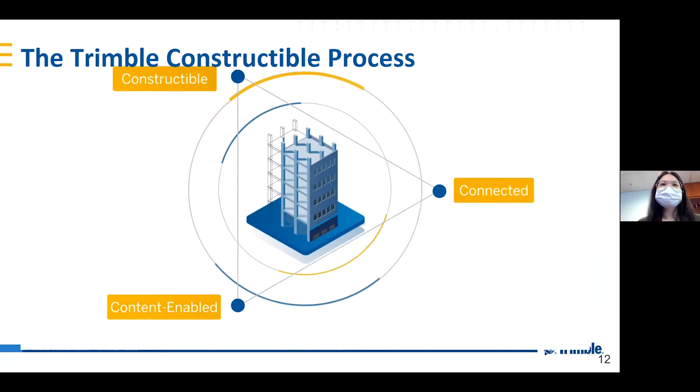There's a digital transformation underway, and the new way to work is leading it. It's called the Constructible process, and it's optimizing the entire design, build, and operate lifecycle. Here's how: Trimble's Constructible process focuses on three key areas - all phases and trades are connected, models and workflows are content enabled, and constructible models drive smart workflows. The first C, connected, is collaboration at its core. It allows information to flow back and forth freely for successful on-time project completion. Cutting-edge technology enables connectivity across...

I think you're having issues hearing the video, Pei-Ling. Oh, you can't hear it? Yeah, I think let's move on. Yeah, running a bit late, so let's move on.

What we're trying to say here is we have the right content, which is digitalized and on cloud that everybody can use and share at the right time with the right information to the right people. This helps us to plan and be connected in whatever we do, whether we're using the data for day-to-day or to extract precious planning information or to allocate resources.

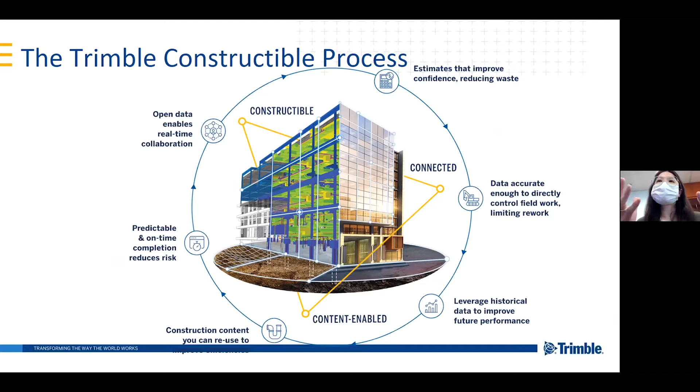The constructible process is not new. It's already been implemented successfully in many companies. Now, we have been building all these models, right?

Everybody must have learned how to build a simple 3D data. And this data, how can we communicate? Because the architect might be using another technology, another software, and your contractor may be using something completely different. So how can we communicate? We need another tool which can help us gel everything together and collaborate effectively.

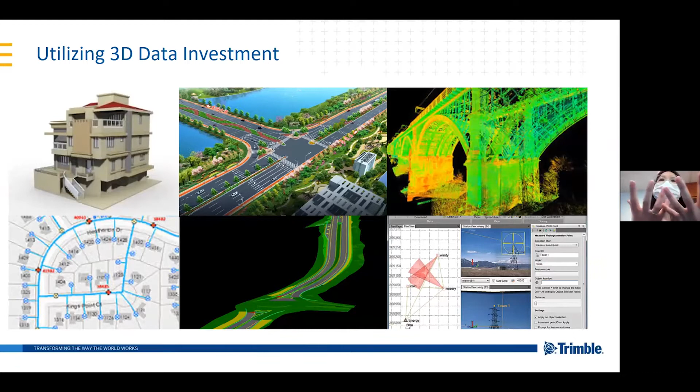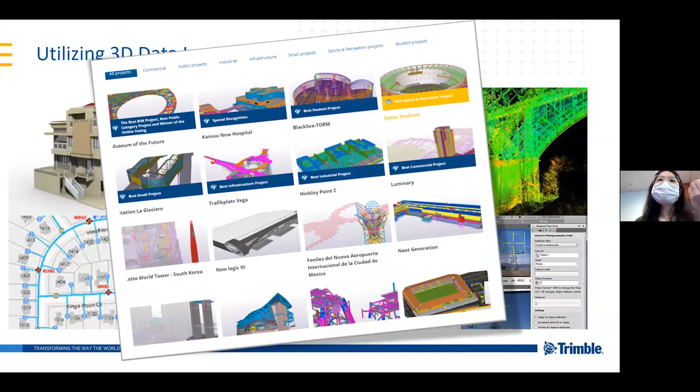So these are some of the models that our users create, and these are very detailed, very accurate models. It's so detailed that we can, in fact, build what we model and build what you see. So there's no discrepancy there. That's very important. The content has to be there.

And so with the right content, we can do a data-driven collaboration. And when I talk about data-driven collaboration, I'm referring to our Trimble Connect solution, which is actually installed on our XR10, which you will see later on.

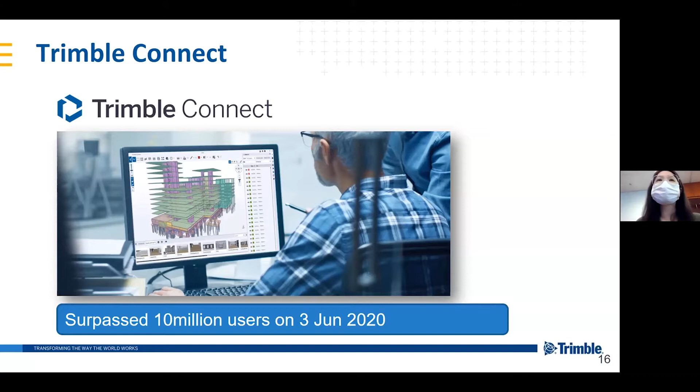Now, during the COVID-19 pandemic, we actually surpassed 10 million users on 3rd June 2020, and everybody is trying to collaborate on cloud. This is the most efficient and, in fact, the cheapest way to do it. And it's very effective. So this is just a snapshot of what Trimble Connect does.

You can use it on your desktop, on your tablet, on your phone. So if anyone has a phone right now, you can download a Trimble Connect app. You can load any information, whether it's a 2D file or a 3D model, and you can view them and communicate it straight away to the entire team. That's how effective it is.

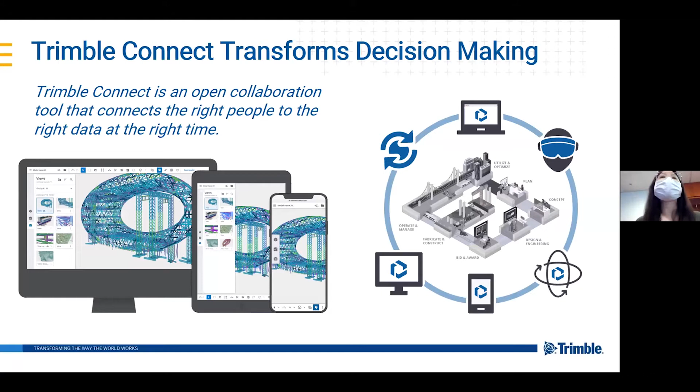And we have real life projects that's already been used. Like I said, we have 10 million users that surpassed already. And these are actual industrial users. So we have a lot of case studies that's online. If you need more information, let me know. We can send it out to you.

Now this brings me to the real topic of the day, which is digitalize, how we can do remote real-time collaboration with the content and the collaboration tool that is already available to us.

So when I talk about XR, it means extended reality. It could be in the form of VR, AR, or MR. And in this episode, we are talking about MR, because we actually are able to merge the virtual and digital world with the physical environment where we are at.

Without much ado, I'm not going to talk too much about our products, but what is worthwhile talking about is this mixed reality can be used by the architects, by the general contractors, by the prefabricators, subcontractors, and all the way to facility management.

So what I want to do right now is to introduce some case studies, and then I'm going to move on to let Leonard show you what he's learned the past few days and what he can use the XR10 on.

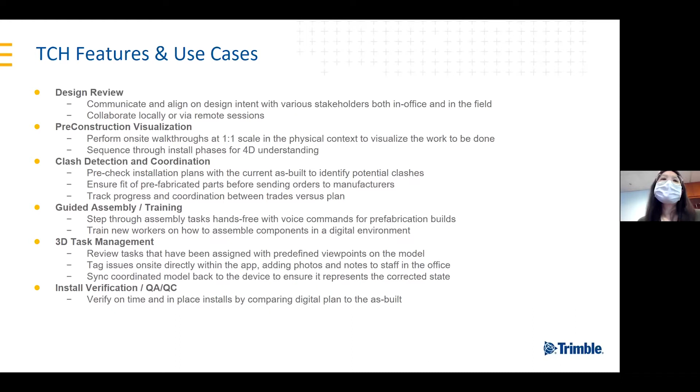So these are some of the use cases: design review, pre-construction visualization, clash detection, and coordination before it goes out to site, and also on-site training, 3D management on-site of how you want to delegate the task and who sees what, and how do you want to create to-do lists and RFIs just via the collaboration tool and the XR10, and also for verification, QA and QC. All these can be done using our mixed reality hardware software.

So there's a video, but I do not want to play it because it seems that you can't hear it anyway. But feel free to let me know.

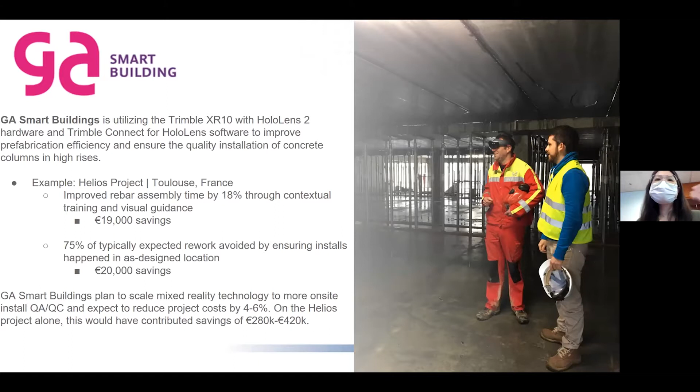This is one of our first GA Smart buildings users. They are situated in France, Toulouse, and they've used this XR technology for a long time on various projects, from start to finish. These are some statistics, and beyond the savings in dollars and cents, there's the satisfaction that this technology actually works. This is a sharing from Remy Vizier, who's leading the team into this new technology.

This is another video, another case study by John Manfield. What happens is they are able to incorporate even beyond what we are offering by adding Dynamics 365, which is Microsoft, so they can do remote assistance. That means whether you're on site or communicating to someone back in the office, both of you can actually annotate on the same model and create an interactive session between each other. We will share this video if we can with the help of the BeyondX team.

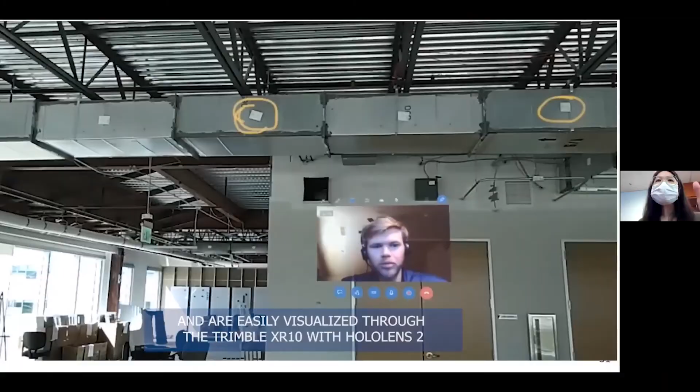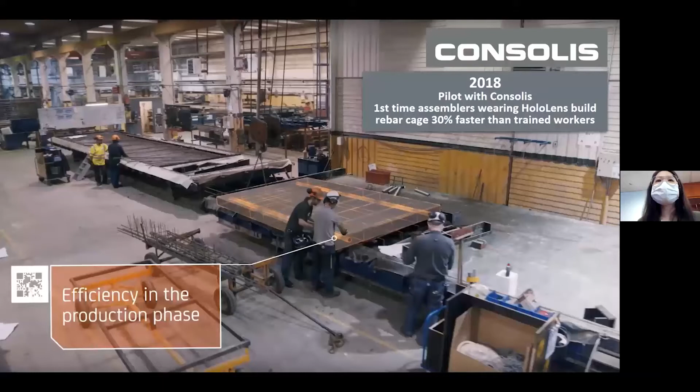In 2018, before the release, this is the pilot project. We used the XR to do a walkthrough on the first run, and the savings are there because we detected clashes just through the first walkthrough. These are things already happening with the technology, taken advantage of since 2018, before the actual official release of the HoloLens.

Our customer also used it on their production floor as training to train new recruits. This is a very interesting video, and there's actually a competition. We're teaching the new recruits how to put all the rebars together, while the experts, the rebar installers, are also putting it together at the same time. Guess who won? The new recruits who have no clue what they're doing. They just followed the steps and were able to get the job done faster than the experts. It meant a lot, and they've actually proceeded to continue with this kind of training.

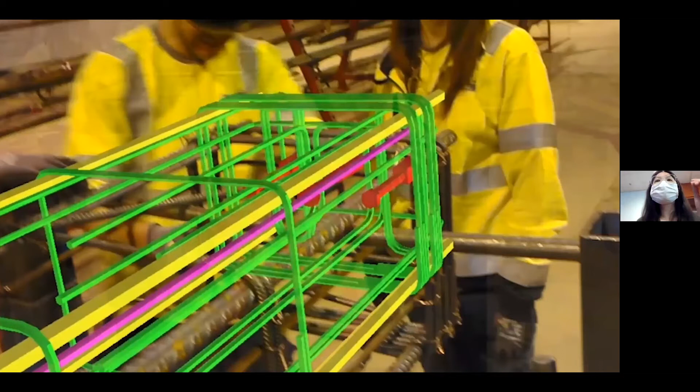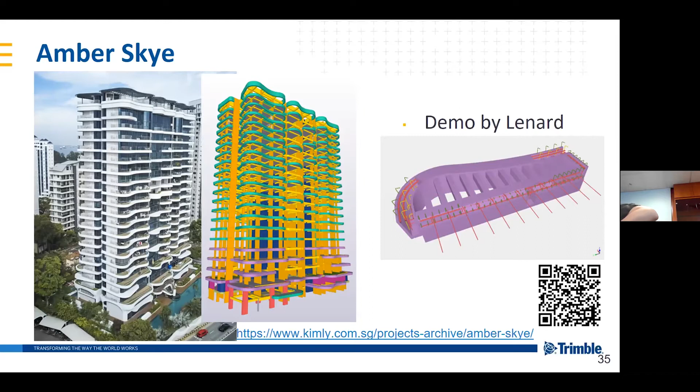Right now I'm going to hand over to Lenard. Okay, can you share your screen, so that everyone can see what he actually sees inside the XR10? Yeah, you can see it now. We can see what you're seeing right now.

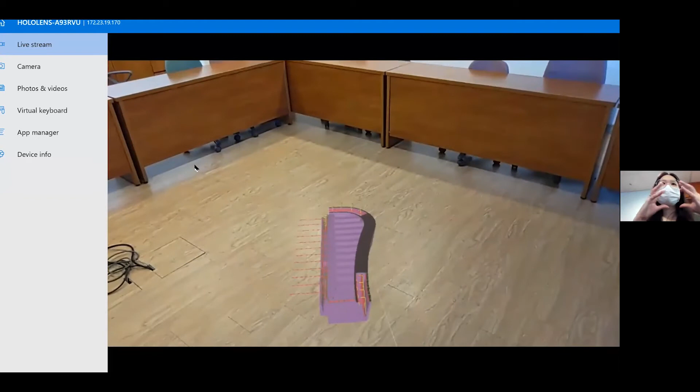What we're going to do first is show you that a big project, when it breaks down to a precast module, we have the information, and we can actually view it using the XR10 on site or at the fabrication floor. This is a very simple model - you want to open up the model of just part of the trellis, the balcony, which is a precast component fabricated offsite. Every bit and every piece was actually transported on site for assembly. This whole thing with the rebar and the concrete elements, these precast elements, is all done at the factory floor, then shipped from Malaysia, JB, all the way to Singapore for installation.

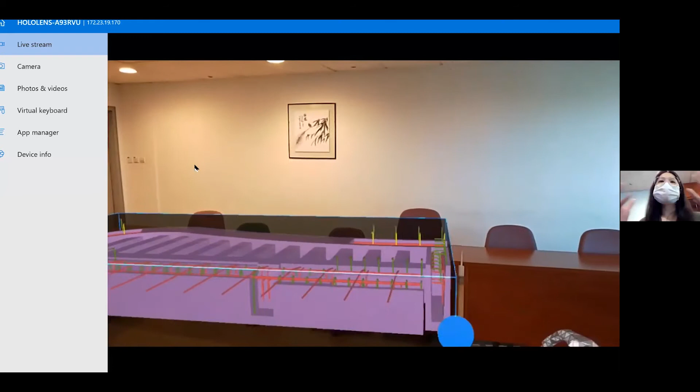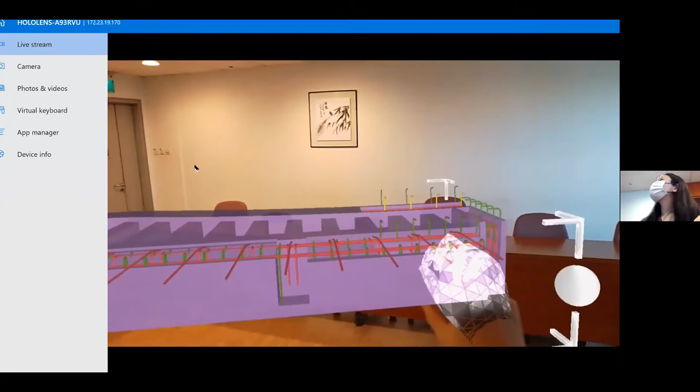So how this was made off the factory floor - unfortunately we don't have a video of that, but this is to show you that if you have the right information, all this can be extracted on site for prefabrication as well as for installation. Let's move on to the other model. Just to give you an idea what Leonard is able to do, to see - he can stretch, he can view, he can look at the information in 3D.

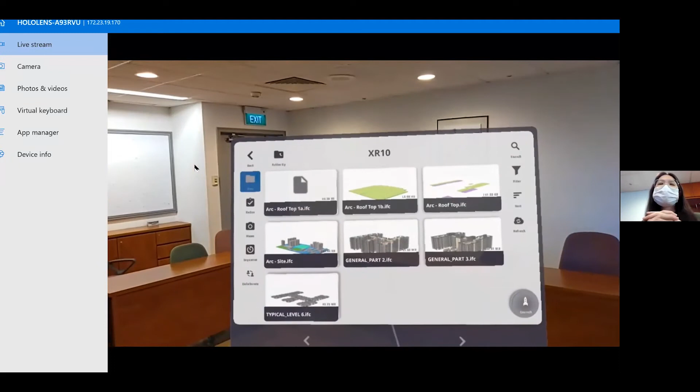Next we want to show you a huge model - this is the Golden Village development in Vietnam. The detail model was developed for 3 or 4 towers, and this is a huge model. We want to show you that you can actually incorporate the architectural as well as structural elements in different layers, and you can view or switch off any layers that you do not want to see at that point in time, or extract information that's relevant only to you.

It's loading—it's a huge structure, so I'll give it some time. I know I'm running out of time, so I'm wrapping up soon, Sunita. This is the last thing that we're going to show you.

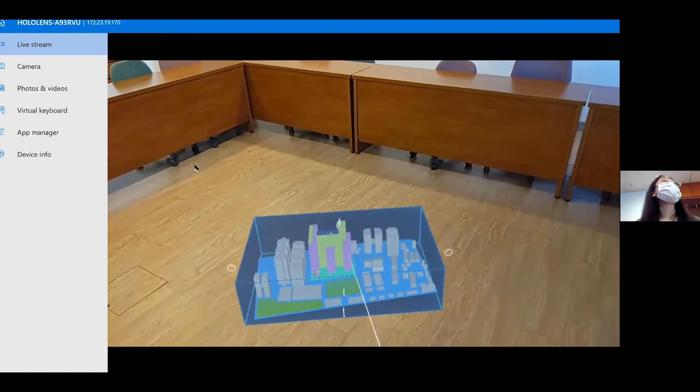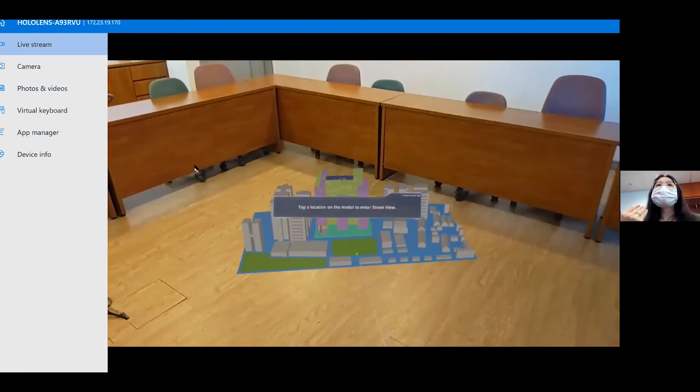What really spells out this extended mixed reality is that you're not just seeing the virtual world. As you can see, I'm in one of the NUS computer rooms. You can imagine if you're on site doing a walkabout, you can actually do a street view, so now we're going to navigate to a street view.

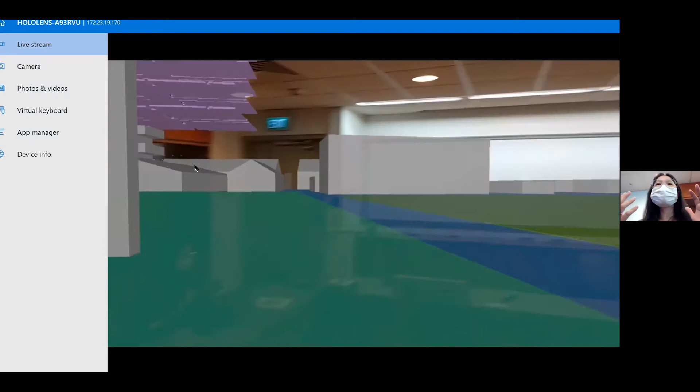Okay, so you're in the basement, I believe. He's looking at the virtually built structure in an immersive mode. You can hop to the 2nd floor or teleport yourself to another floor if you pick the location—he just points, and then he's there. I don't know which floor this is, but you can see there's a ramp. He's doing a turn around instead of a walk around. Maybe you want to walk around before everybody starts.

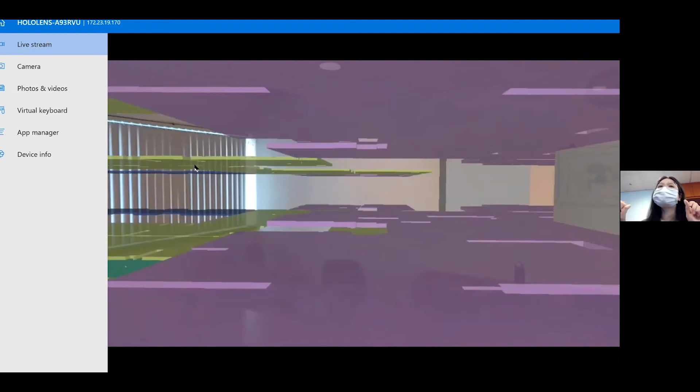Yeah, so literally you are taking content off the screen and putting it onto the job site. We don't have access to any job site right now, but what we want to show you is the idea that if you have enough data, you can actually create such a digitally monitored remote collaboration.

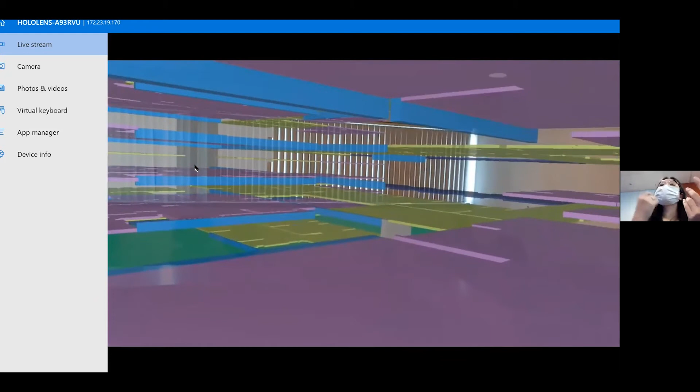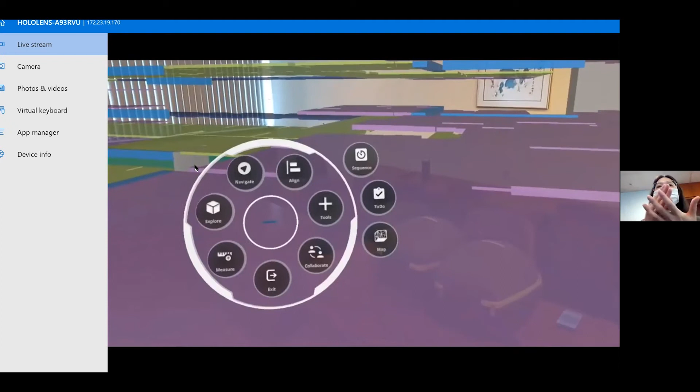What Leonard is going to do is tap on any element—either he can find out more about it or create a to-do list. For example, if you detect any clashes or anything that isn't fitting, you can take a snapshot and create a to-do list. This to-do list will be sent to the assignee, be it an M&E guy, the engineer, the architect, or the contractor, and they'll receive it in real time via email.

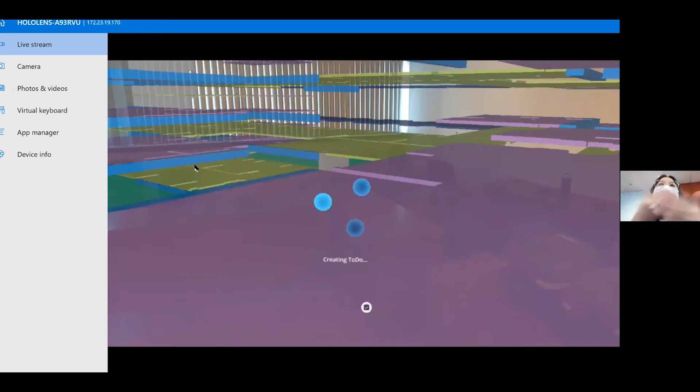When they receive that email, the context is there because they can see where the problem areas are. There'll be a tag saying whether the conflict is resolved or in progress, and everything will be tracked. At the end of the project, if you want to do an RFI, this is where you can export the entire to-do list, who is responsible, what's been done, what's resolved, and what's outstanding. All of this can be used for management review and approval.

So this is something done in real time, and we actually have people already using this all the way from prefabrication to delivery to site, sign off, and approval.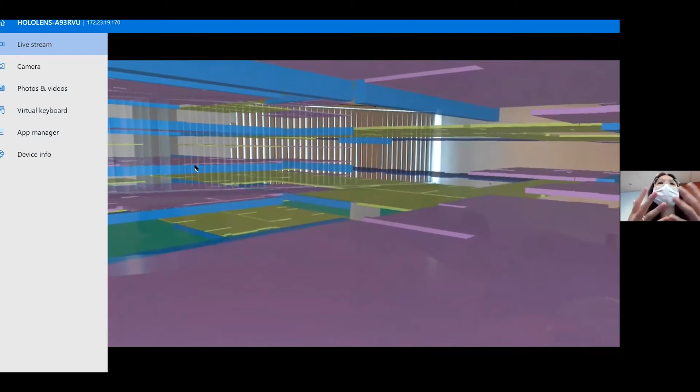Hi everyone, my name is Sean Koo. I'm the CTO of H3Zoom.ai, the Artificial Intelligence and Digital Solutions business unit within H3 Dynamics. H3 Dynamics is a startup founded in 2015 in Singapore, and over the course of 5 years our focus has been on AI digital solutions as well as robotics solutions such as drones. We have 24 patents filed, 5 granted, and a global team—headquartered in Singapore, with outreach in the US, Brazil, Mexico, New Zealand, and Hong Kong.

The focus for H3Zoom.ai is applying artificial intelligence as well as drone technology for the condition monitoring of industrial assets. As you know, the infrastructure in the built environment is aging, and our mission is to democratize the use of such technologies to speed up and augment the condition monitoring of this large-scale infrastructure.

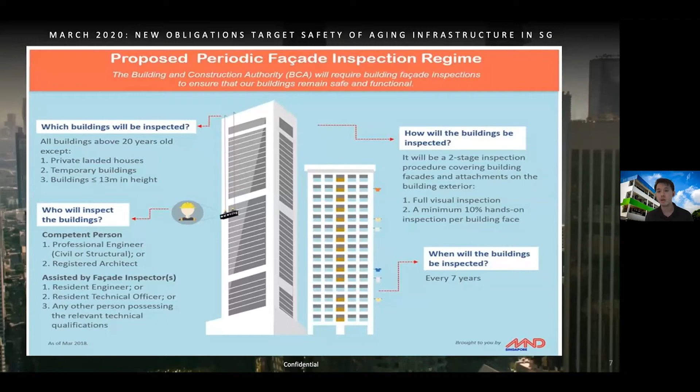So in order to continue to keep our city safe, we've actually worked very closely with the regulators to basically review the existing inspection process. And what we found was, for this current existing process, it involves a couple of various stakeholders.

So you have engineering companies, architect firms, professional engineers, building owners. Typically the process of maintaining and inspecting buildings would take anywhere between 4 to 8 weeks, depending on the complexity of the building.

And what it costs the building owners can be anywhere between $12,000 to $25,000. Bear in mind, this cost could be just for the visual inspection component, or it could be the physical inspection component. Really, from an inspection process perspective, the operational setup can actually be quite costly.

So when we look at building inspections, you could have a gondola, boom lifts, or even cherry pickers, with tight and difficult access to reach areas where some inspectors have a hard time actually reaching. And in 2018, there have been 17 work-at-height accidents.

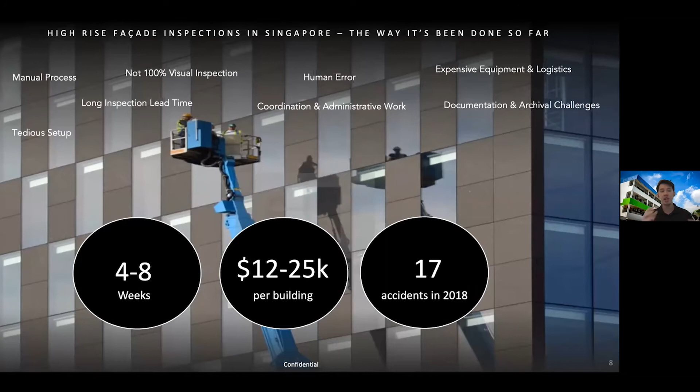So looking at this archaic process, what we have done is co-developed a solution with JTC, as well as worked with HDB and BCA, to basically arrive at a solution that involves artificial intelligence and the use of drones to improve the inspection process by over 70%, and increase productivity gains of some of these inspectors and managing agents by over 70% as well.

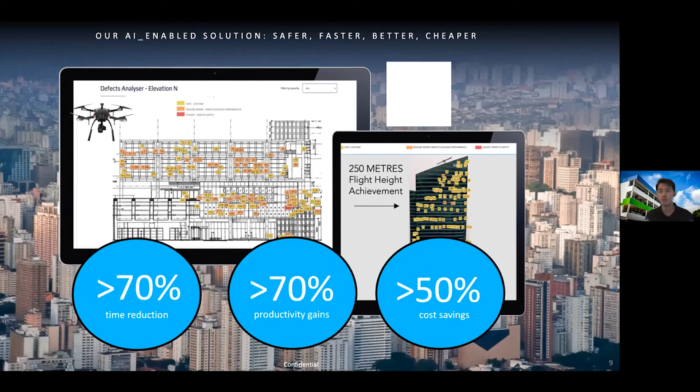And really, from a cost perspective, we've actually helped a lot of building and asset owners save over 50%. So the existing workflow today consists of elevation diagrams.

And really what is done today from an inspection process is literally we have inspectors on the ground, observing and performing the visual inspection either through binoculars or a point-and-shoot camera. And they are literally marking potential critical issues on an elevation diagram such as this.

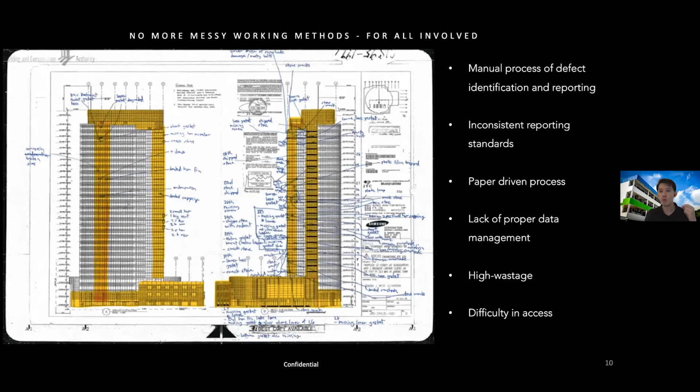And really you can see the process is pretty inconsistent. And what we aim to do is to digitize this process using drone technology.

To basically augment inspectors on the ground, to reach areas where it would be traditionally difficult for them to reach, and to capture images or video files in a more comprehensive and holistic manner.

So with drones as hardware, this is being augmented by a flight path automation software to speed up some of these inspection processes. Data that is being captured from the drone is automatically processed on a platform.

And really that's where our machine algorithms actually get to work. Unstructured data such as images and video files are automatically distilled, and the computer vision algorithms analyze these images, segment the images, and flag out, let's say, critical defects and issues, to subject matter experts such as professional engineers or civil engineers to validate and review some of these data sets.

And the consolidation of artificial intelligence and workflow automation, we would be able to portray the insights onto a web application that is later accessed by building owners, facility managers, or managing agents, to get an overview of the condition health of buildings.

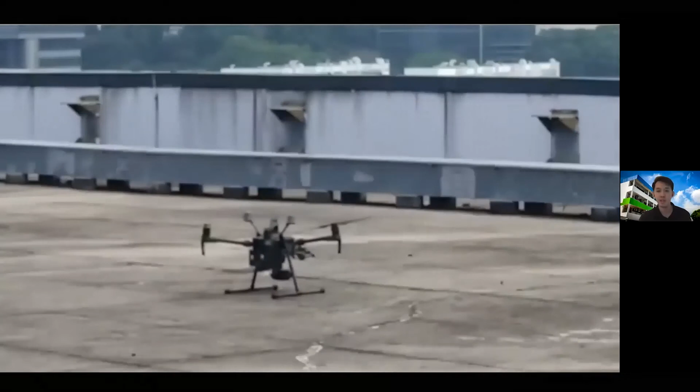Today, as you can see here, the drone automation is managed on site by two drone operators. One is looking at a console, and the second drone pilot ensures that the flight path of the drone to be taken is set, and the drone automatically takes off with a click of a button.

When we talk about full autonomy, this is what the technology is all about. The flight path that is planned is automatically uploaded onto the drone, and with a click of a button, the drone is executing this flight path.

As you can see here, the drone is making its way towards a building located in Fusionopolis, and it's going to undertake an inspection flight path.

From an augmentation perspective, the pilots are on site to ensure the safe integrity of the drone undertaking the inspection flight path. From the pilot's console, they're able to see through the lens of the drone performing these inspections.

Traditionally, for inspections to be done, you would have to send workers to the top of the rooftop to manually inspect the roof. It really depends on whether access is available, safety permits, and so on. But with drones, we're able to reduce that barrier of entry.

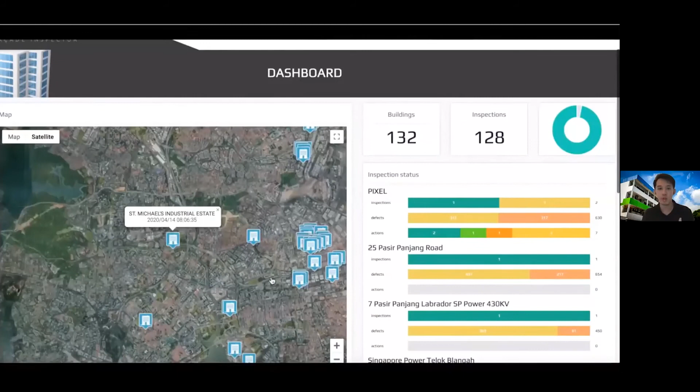Once the drone completes the inspection, the data is automatically uploaded onto our platform. And really, this is where the magic happens.

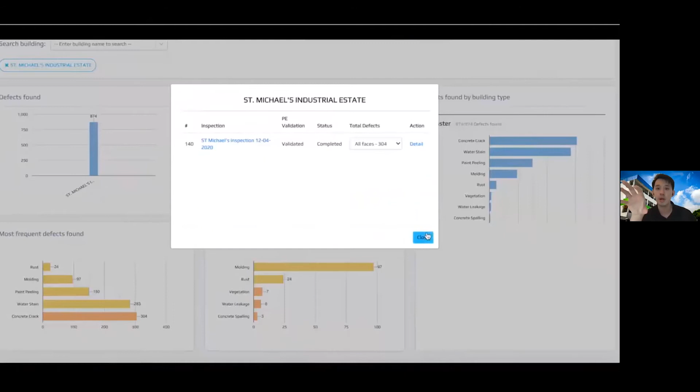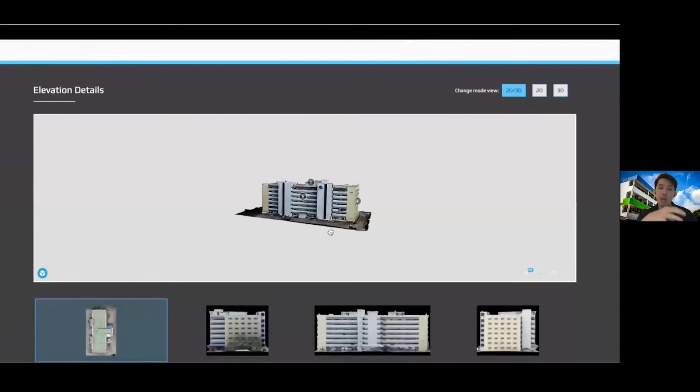Through several workflow automation and machine learning algorithms, the insights are ultimately shown on the platform, and the building owners are able to get insights such as the total number of defects found, whether there were any critical defects, and whether there were any defects that require a repair.

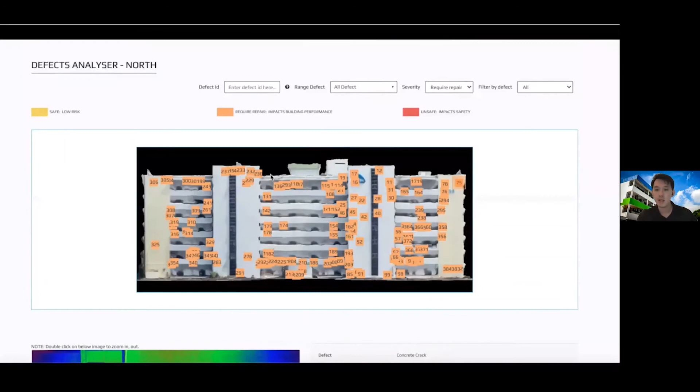The images taken by the drone are automatically analyzed by computer vision models, and the results are automatically mapped onto 2D elevation diagrams.

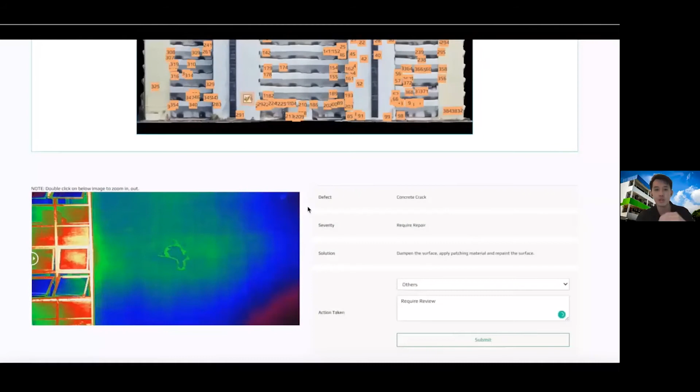With thermal imaging, the platform is automatically able to reference thermal images with HD images. This gives an overview of the building condition, and the managing agent or building owner is able to share and download inspection reports.

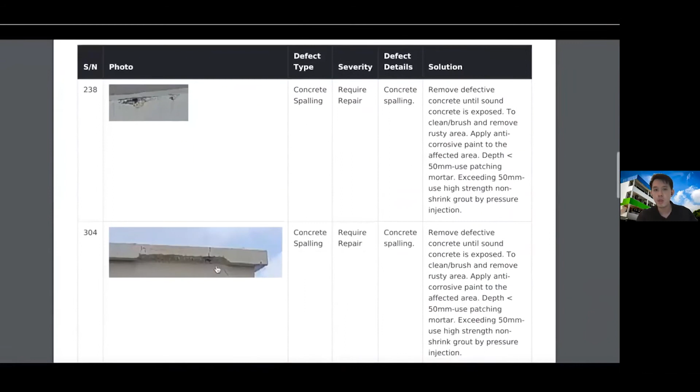When we talk about sharing information with various contractors or vendors, if they're working with a contractor that just looks at spalling concrete, they would be able to share such inspection reports with a click of a button, and the inspection reports are automatically generated.

These workflow automations, combined with machine learning, allow us to expedite the inspection process and help digitalize the digitalization process for building owners, digitizing the existing process for maintenance and operations work.

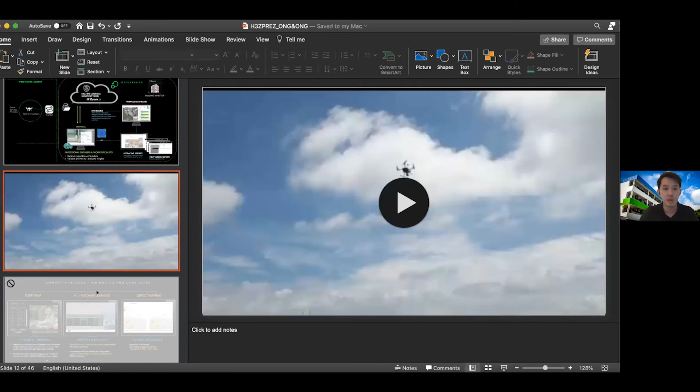So what is the software? Back to some of the core products that we've built. Essentially, in that video that was illustrated, you could see there were definitely certain algorithms used to plan the drone inspection flight path.

What these algorithms we built are actually for a product called FlightMap. FlightMap is able to ingest any 3D mesh model as a baseline, and with this 3D mesh model, we're able to extract valuable metadata.

Such as whether there were any obstacles around the building, or weather conditions. With map layers layered on top of this mesh data, as well as parameters from the drone, such as the battery health and the speed the drone is supposed to be moving at, we consolidate all these parameters. What the algorithms actually do is construct a unique flight path for the drone, for any sort of complex structures.

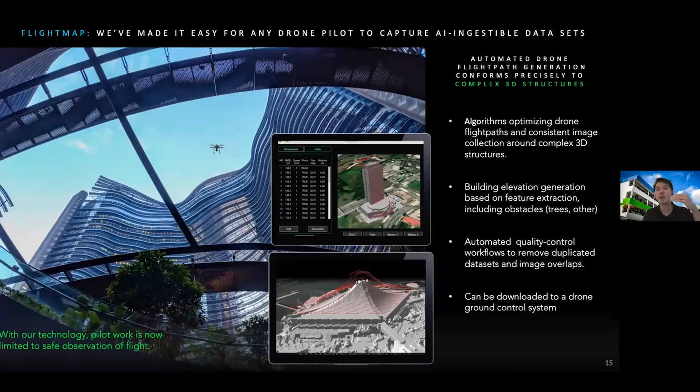As compared to the current inspection process, this really enables the inspection process to be sped up tremendously. So with drones, there is already existing time and cost savings, but with FlightMap, that basically improves efficiency by an additional 50%.

And this is just an example of a typical flight path that is planned for a building, just to give you a visualization idea.

So once the images and video files are actually captured by the drone, with FlightMap it then goes through several processes, and what we've co-developed with JTC over the past 3 years is a proprietary computer vision algorithm along with a rather sophisticated data pipeline infrastructure. The focus has always been: are we able to identify anomalies and defects on building facades and building envelopes today?

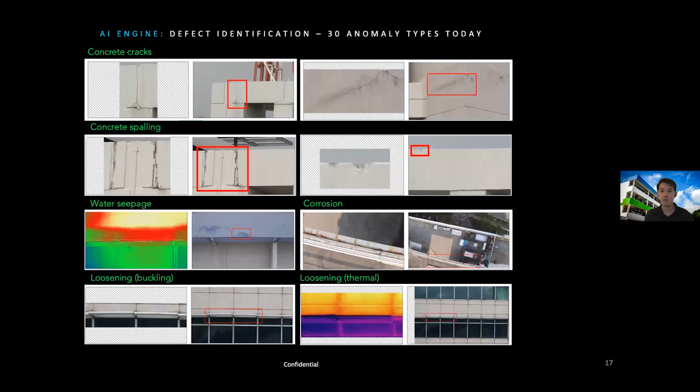And these are just some examples of what the algorithms are able to flag out — anything from concrete cracks to spalling, corrosion, buckling, and so on. I'll just go through and share this proprietary AI infrastructure that we've developed. We actually code-named it Zoom Net V4.

Just to give you a demonstration of how this works: the images taken from the drone, once uploaded onto the platform, are all processed with back-end code. But with this interface, it basically gives users like yourself a view of what the AI actually sees.

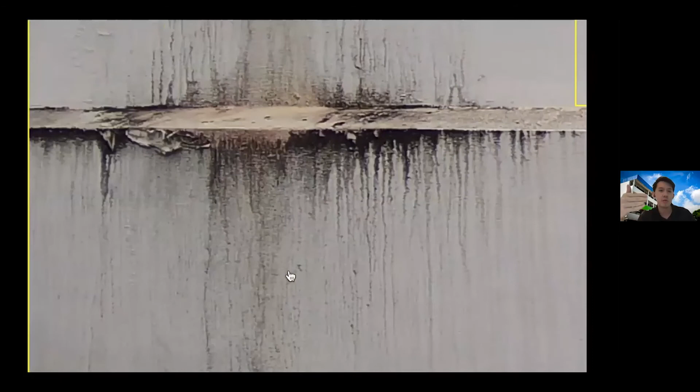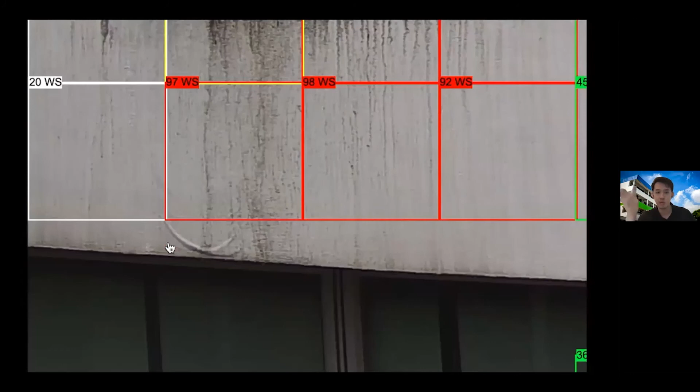So you can see from this image that was taken approximately 5 meters away from the building facade, the algorithms were able to identify several defects — water stains are one, concrete defects are another.

And this is another image. You can see that just from this image alone, the algorithm is able to accurately identify and mark out these defects. This helps the subject matter expert speed up the process of validation and review.

And just to share some of the other images that we were able to capture — those images shown at the beginning of the video were taken from the drone from the external facade. Now, what about images that were taken with mobile devices?

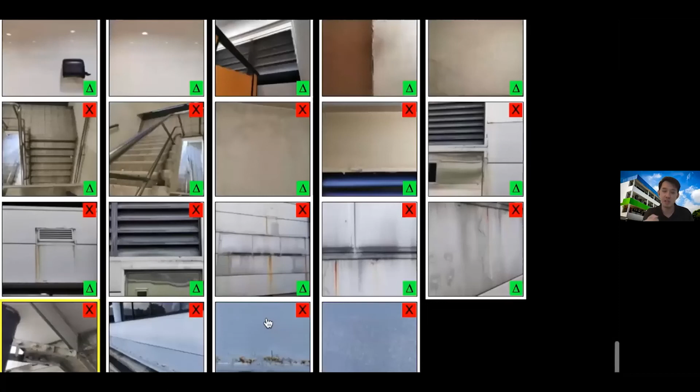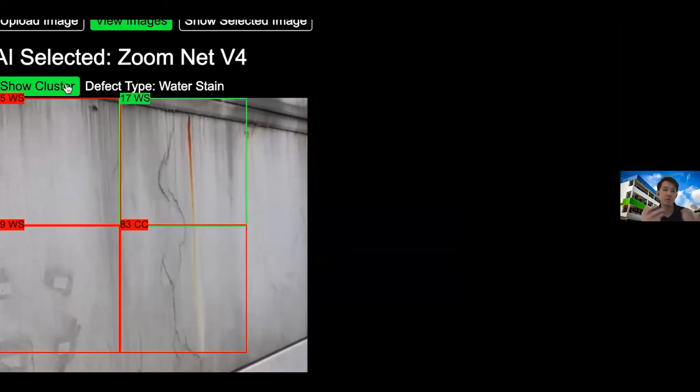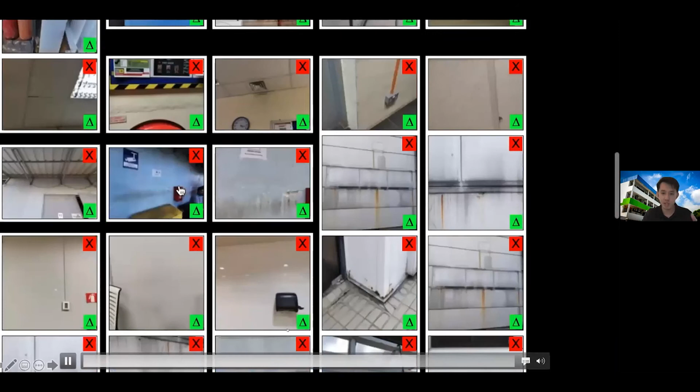So the algorithm works and is able to identify some of these defects as well. You can see rust issues, and again it's able to identify multiple defects on one image. So these are just some examples of how artificial intelligence can be applied for on-site inspection, and really speed up these inspection processes.

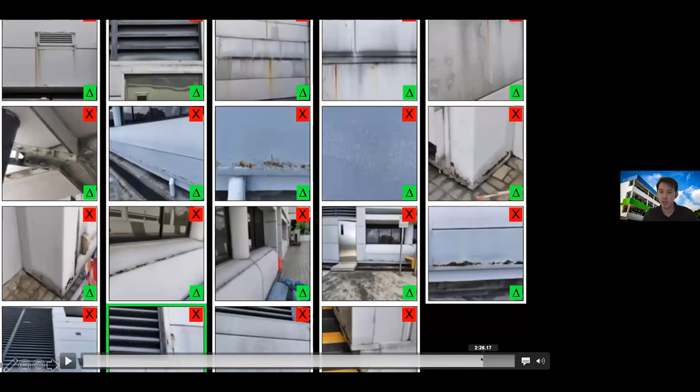So I'm just going to skip ahead and stop right here. As you can see from those images, the application of our technology to date has been the maintenance and operations phase of the entire building life cycle.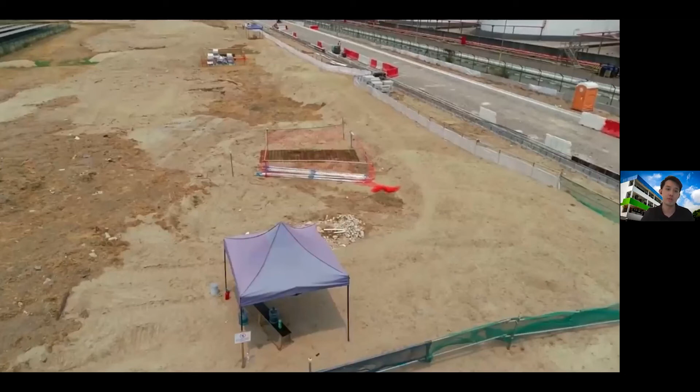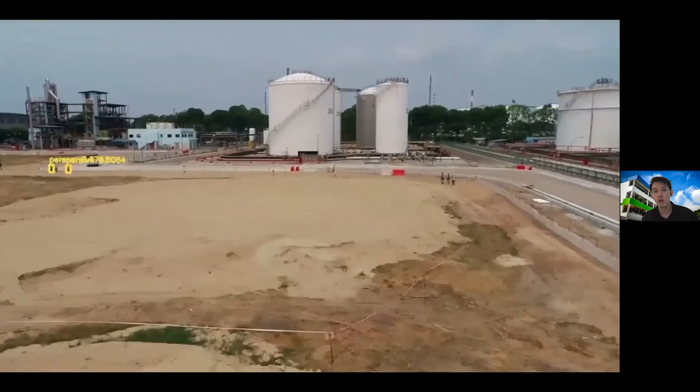Now, obviously, the solution that has been developed can also be applied for the construction phase. So for a construction site such as the one you see here, how artificial intelligence can actually be used would also be for workplace safety. This is just a snippet and a teaser of how AI or machine learning algorithms can be adapted, specifically for computer vision.

Besides identifying defects, it can be used to identify objects as well. So identifying objects on site for construction safety is another potential use case that we are exploring. Right, so let me just skip ahead.

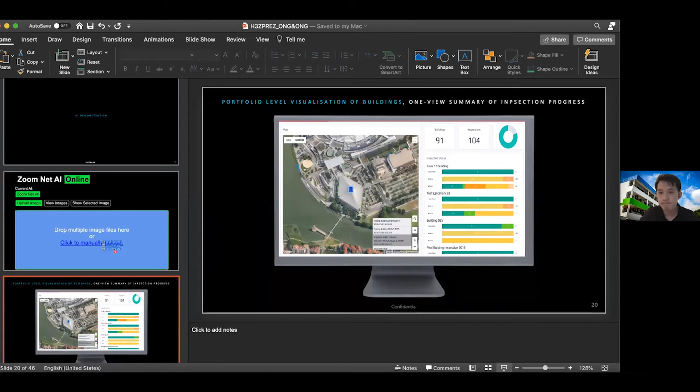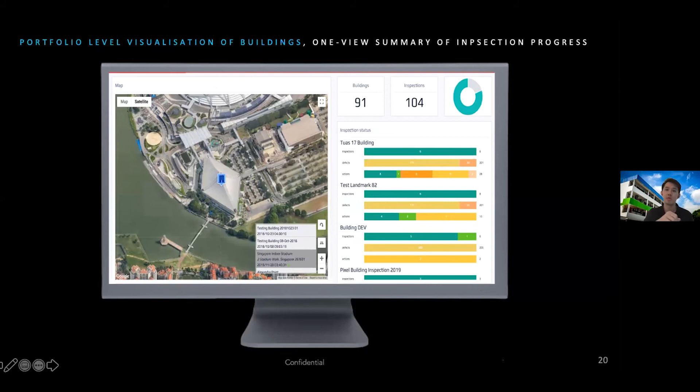So once the images have been processed and reviewed and validated by a subject matter expert, all this information is made available on a one-view summary platform, at a portfolio level. Building owners and managing agents are able to get this overview of the asset condition, specifically the number of inspections done, and whether there were any critical or unsafe defects.

And the insights they're able to draw - defects that fall under the category of requiring repair would ultimately translate into something unsafe or critical. What this really does is enable building owners and managing agents to plan ahead and get a better overview of exactly where these defects are located on their building assets, so that with this information they can coordinate and work with repair and rectification vendors to better plan rectification works in advance. So making this information more transparent would enable asset owners to also save on costs.

When it comes to issuing RFIs and RFPs for rectification vendors to conduct some of these works, as we accumulate more data, building owners are able to review, year on year, the changing conditions of the buildings they are managing. So if we talk about the implementation of proactive maintenance...

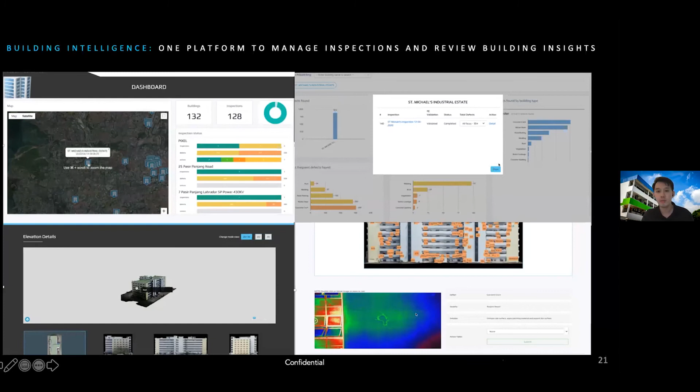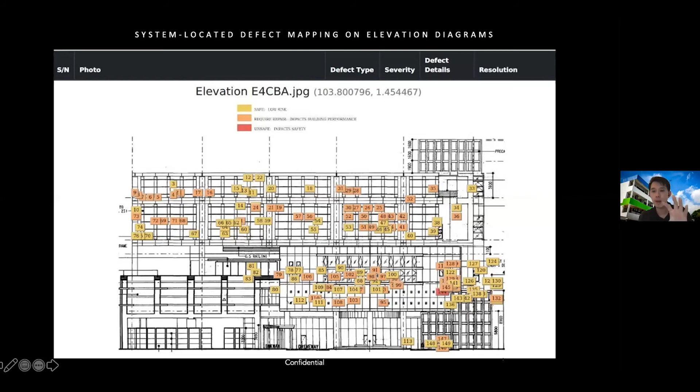So this is, I would say, at the end, a byproduct of the platform is a system-located defect mapping inspection report. So essentially inspection reports, as shown in that video - building owners can actually download an inspection report with the anomalies mapped. This can be shared for review.

So, okay. Over the past year and a half, we've actually inspected over 250 buildings, and we've also accumulated over 14 terabytes worth of data. In terms of images, we've validated over 4 million images, and as a young startup based in Singapore, we're extremely proud of this accomplishment.

Just to share, some of our major clients here in Singapore include JTC, HDB, Singapore Power, SMRT, and the Building and Construction Authority. Our anchor client and R&D partner for the past three years is JTC. If you do not know much about JTC, they are actually Singapore's largest commercial industrial development agency, and a co-development partner for the H3 Zoom solution.

And really the sort of benefits that JTC has achieved by adopting artificial intelligence and drone technology to help with the digitalization process...

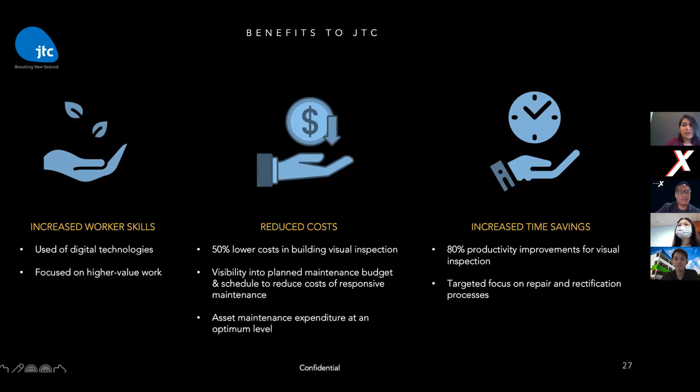Okay, maybe a question to you. Do you think that wearable tech will replace tools on site? You know, like now we use the laser measuring tools and all. Do you foresee this being replaced?

I think in terms of technology, it's always improving and always being enhanced. So what would happen is that as technology becomes more democratized and more affordable, things will start to move very fast. Even our XR10 is already the second edition. The first edition was a lot more clunky, a lot more heavier, a lot more uncomfortable, and had limited vision.

So technology is always going to be replacing or enhancing what we have. We think that at some point, some of the technology will be superseded, become obsolete, and be replaced by a more integrated system.

Like in our XR10, besides being able to view the physical and the virtual world, you can actually hear as well. We added an audio device that works through bone conduction, so that when you're in a loud environment on site, this little audio device sits at the helmet and conducts sound so we can still communicate through audio.